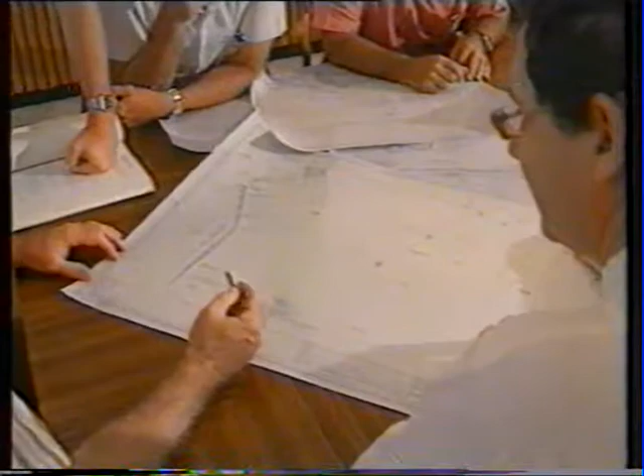NORQEB, in association with Balfour Beatty Mapping and Hydrographic Services, Pure Marine and Magnetic Marine, have undertaken the installation of a new 22 kV submarine cable from mainland Townsville to Magnetic Island, a distance of 12.4 kilometres. The project will take several months to complete, with the possibility of delays due to poor weather conditions. The new cable will initially be energised at 11,000 volts, being the standard distribution voltage of the region. However, the option is available in the future to energise this cable at 22,000 volts in order to double the capacity on the cable.

Magnetic Island has a permanent residential population of 2,000 people, the majority of whom reside in the 4 main bays at the southern end of the island. Development in these bays is residential, with a small amount of light industrial and commercial premises. In addition to the benefits of a regular supply of electricity from the mainland, the island also receives town water and telephone services. Magnetic Island is a relaxed tourist environment, patronised by most visitors in the region. This influx of tourists further increases the demand for suitable accommodation and facilities.

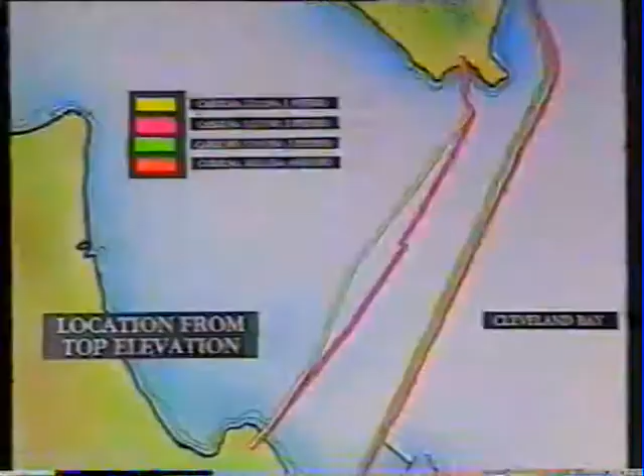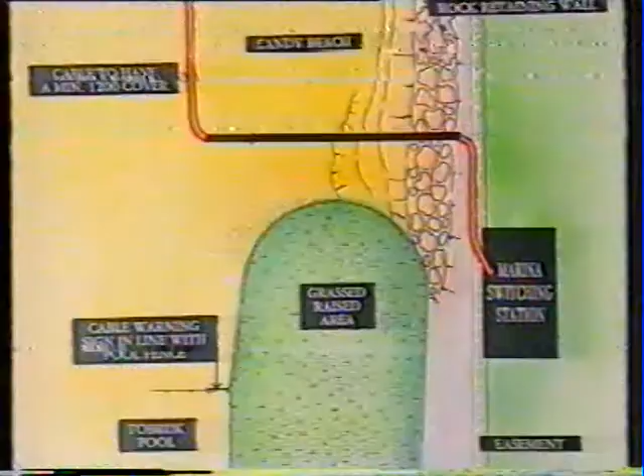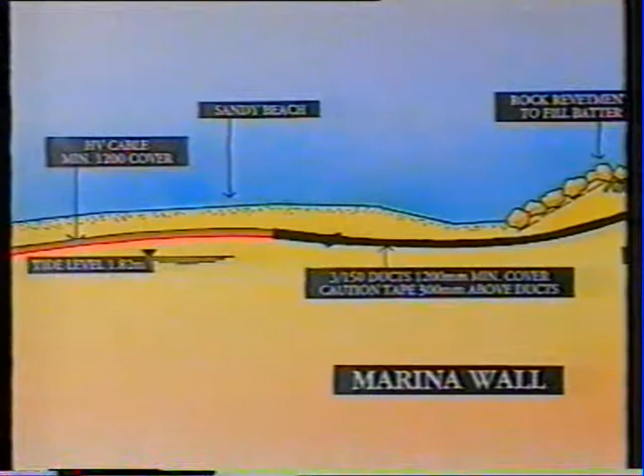Currently, the island is supplied with power from 3 submarine cables with a firm capacity of 2 MVA. With this additional cable, the firm rating to the island is now increased to 7 MVA. The cable route commences at the mainland Marina switching station and goes under the Marina seawall, along the beach and into the water, where it will be buried out to the end of the Marina entrance channel, crossing an existing telecom cable on the way. The cable was then laid across the seabed to the island and over a reef at Nelly Bay.

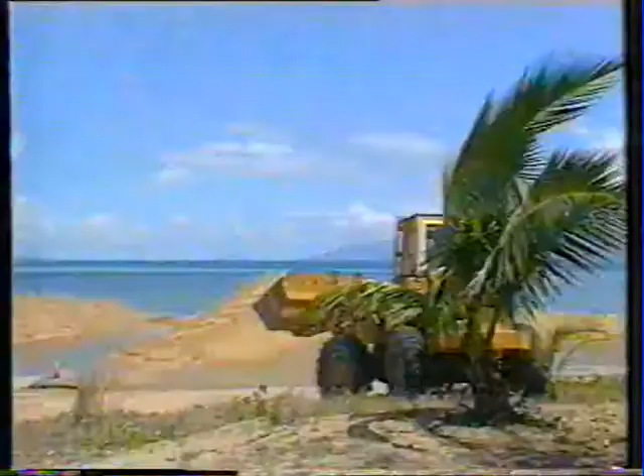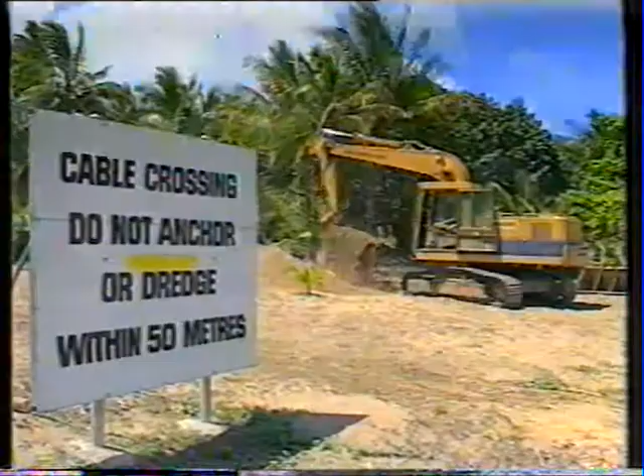Several permits and approvals were required from the Great Barrier Reef Marine Park Authority, National Parks and Wildlife Service, Department of Harbours and Marine, Townsville Port Authority, Department of the Environment, Fisheries, Department of the Environment, Beach Protection, Townsville City Council, Telecom, Breakwater Marina and Magnetic Quays Proprietary Limited. Since approvals and tenders have been called, a large stockpile of sand has been deposited on the intended cable route on the island foreshore. This additional sand represented an obstacle for the installation of the new cable. The job entailed firstly digging through to the original beach and then down to the required depth for the cable.

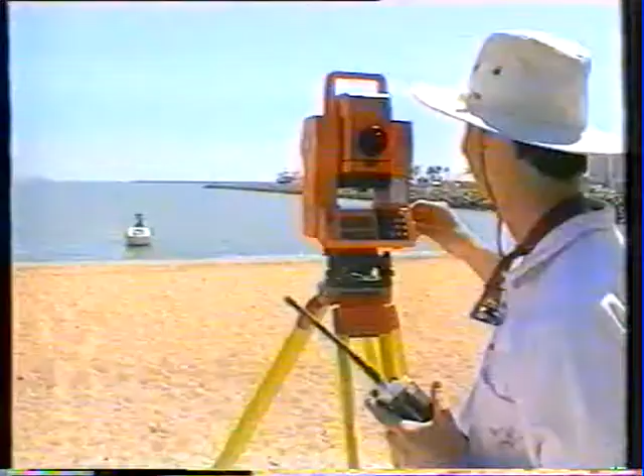200 metres of the existing cable number 3 will have to be moved to enable the new number 4 cable to be laid between number 3 and the Marina Channel, maintaining a clearance of 30 metres. 1,500 metres of the number 3 cable was buoyed to determine which sections needed to be moved over. The section of cable was excavated by divers using a suction dredge in zero visibility, raised, moved over and lowered to its new position. This section was then buried to a depth of 1.2 metres using a high-pressure water jet. An underwater telecom cable complicated the procedure further, as this cable had to be raised to shift number 3.

The new number 4 cable will also be buried to a depth of 1.2 metres for 1,500 metres at the mainland end and 150 at the island end. The remainder of the cable rests on the seabed. A team of divers is working in shifts below in the mud, where their only sense is through touch. With a high-capacity compressor, they have constructed a large vacuum pump, which sends a plume of brackish water 4 metres into the air.

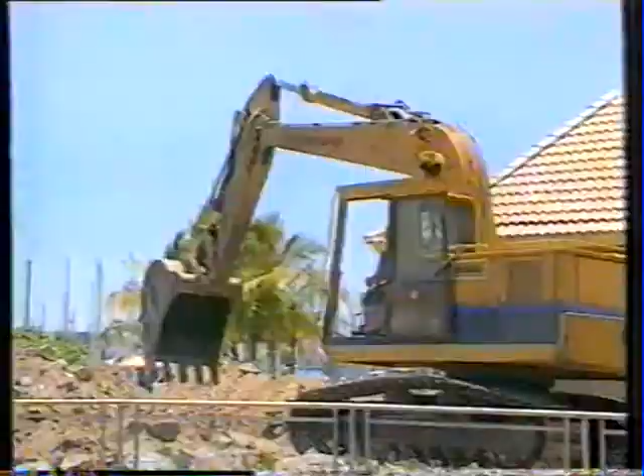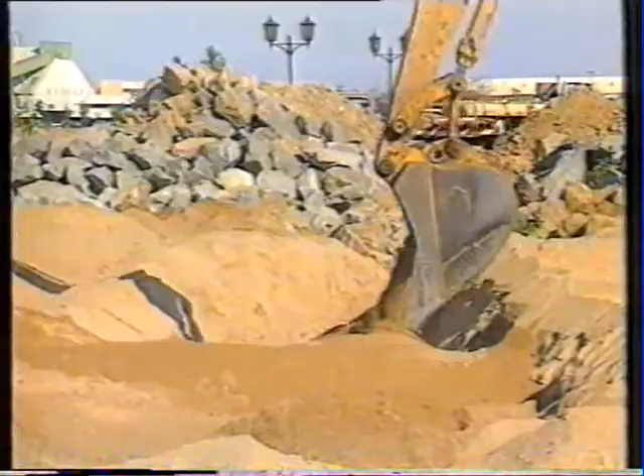Meanwhile, at the marina end of the operation, cable ducting and excavation are proceeding above the waterline. Additional ducting is being installed in the trench to obviate any need to dismantle the rock seawall in the future. At this time, CB Marine are making preparations for the floating platform to be used by the cable jointers.

The dumb barge is fitted to suit this particular job with heavy winches and 4-point anchoring capabilities. 2 of these sections will be bolted together and an air-conditioned aluminium shelter erected on the platform. Preparations are now complete for laying the new cable.

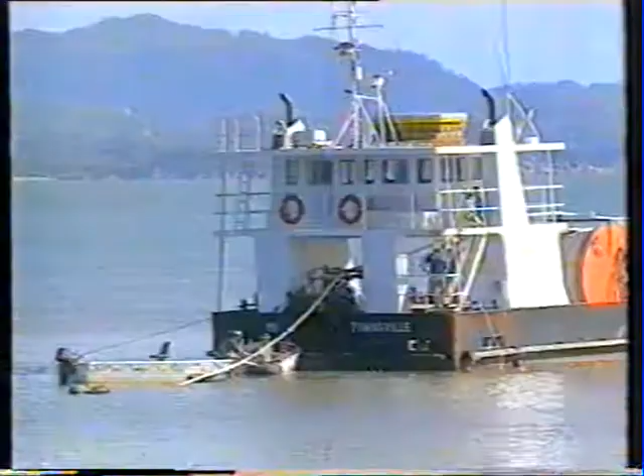A heavy vehicle barge, the Mark I, is employed to transport the cable to the site, and winching from the barge to the mainland end begins. It's a perfect day, and weather conditions are more than favourable for this process.

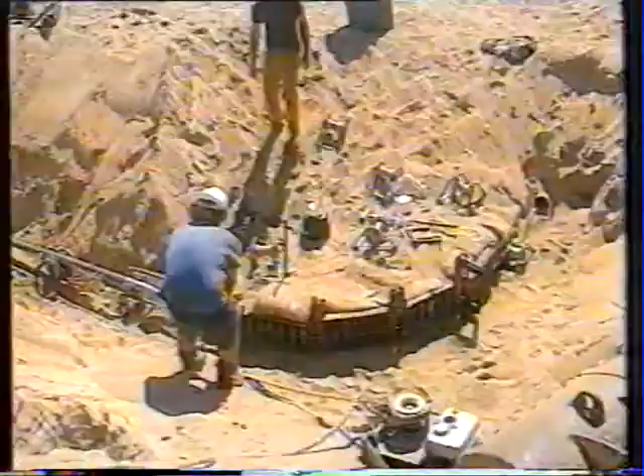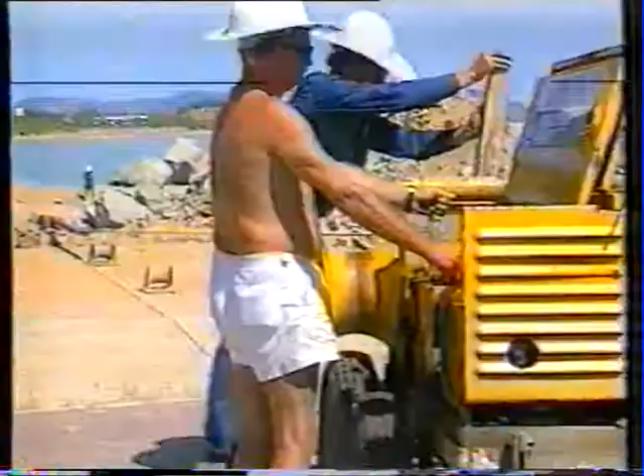To ensure the cable is placed correctly, the barge is anchored at the bow by 2 anchors, and the MV Tangaroa is kept standing off to keep the barge from drifting sideways during the winching. Additionally, the surveyors have located several bearing-fixing beacons at strategic positions, further ensuring the accuracy of the laying.

This section of the installation is the most complex and involves floating the first section of cable into position before lowering it down. The operation is continued successfully throughout the morning and progresses according to schedule. Having winched the cable through the conduit, the trench is then backfilled to the substation.

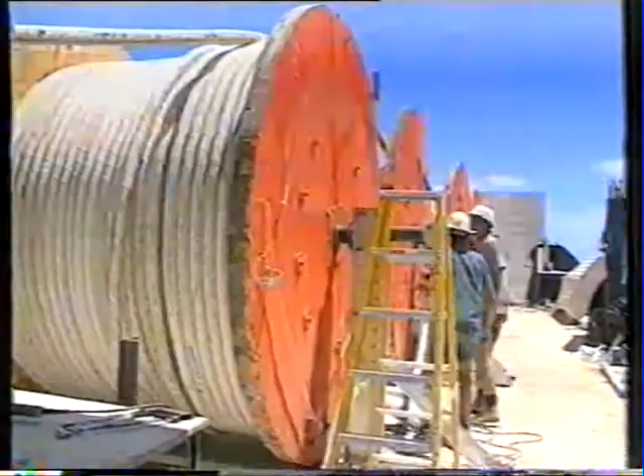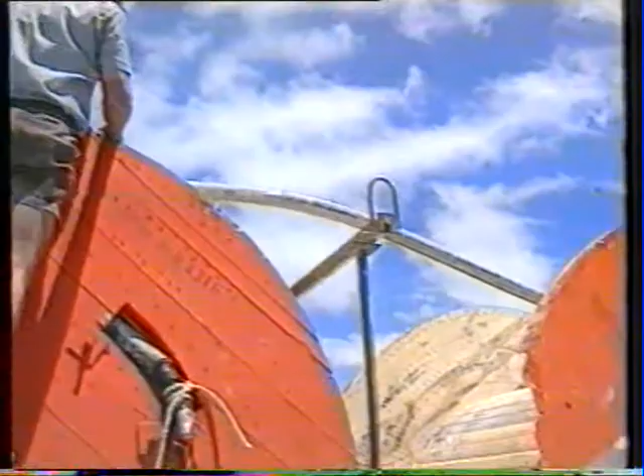Laying the cable is continuing aboard the Mark I. The laying barge is kept on course via visual means, with a land-based surveyor calling out corrections to course via radio link. The shipboard surveyor confirms position by means of a laser distance measuring device, calculating range to 2 fixed mainland stations. This range information will then form the basis of the as-installed plot. Maximum deviation to course of 10 metres was achieved almost 100% of the time.

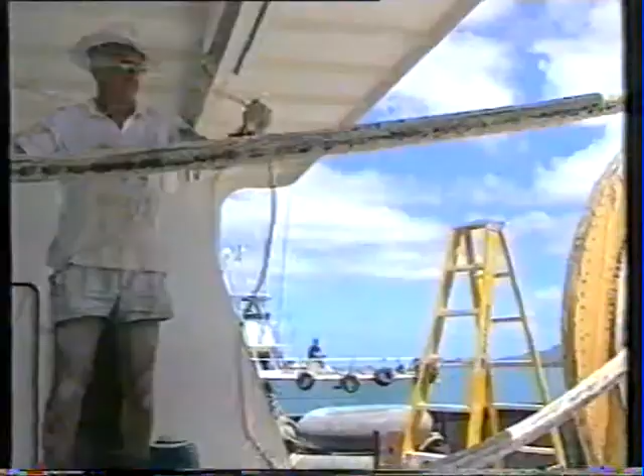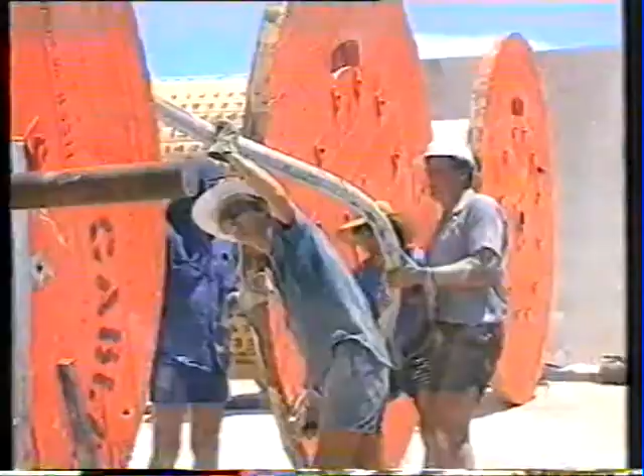The cable will be laid in 13 900-metre lengths and 1 250-metre length at sea, with the entire laying operation being performed in 4 separate operations of approximately 5 hours. The end of each cable is lashed to the next section as the cable enters the water. The weight of the cable and manoeuvrability at sea leads to some problems for the crew on the Mark I.

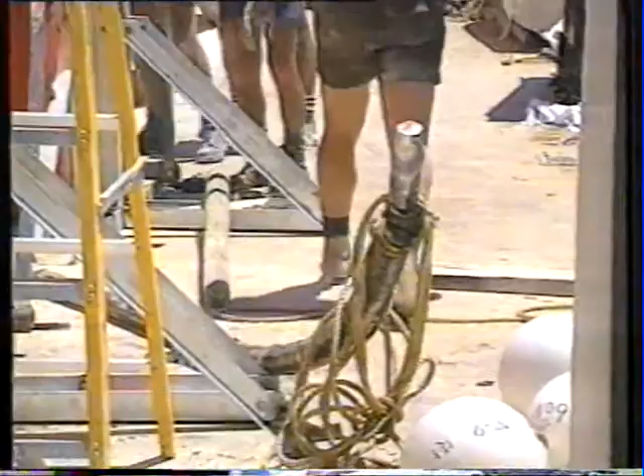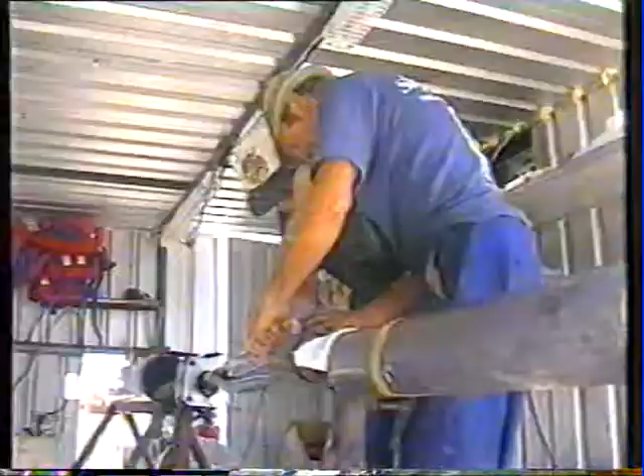Having laid the sections of cable in place, the dumb barge is manoeuvred into position over the first joint position, and jointing begins. Again, the services of the MV Tangaroa are called upon to manoeuvre the dumb barge into position. Cable ends are winched into the workstation, and work begins, jointing the cable.

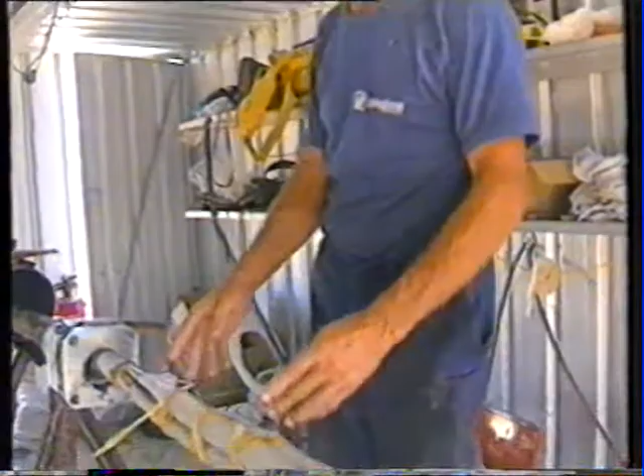What we've got, we've got two ends of the cable. So to join them together, we put ferrules. Right, we've got ferrules in. Ferrules in the middle. We sweat the ferrules, clean them, close them up, and then we insulate them. Bring the insulation up to the size they require on the drawing, then we put the screening over. Bind the screenings together at both ends of the cables.

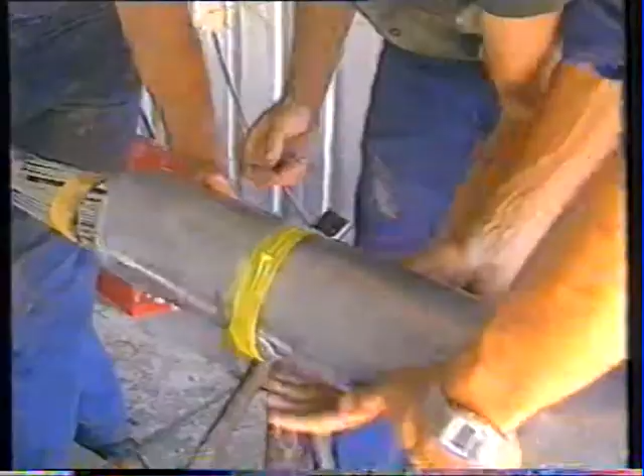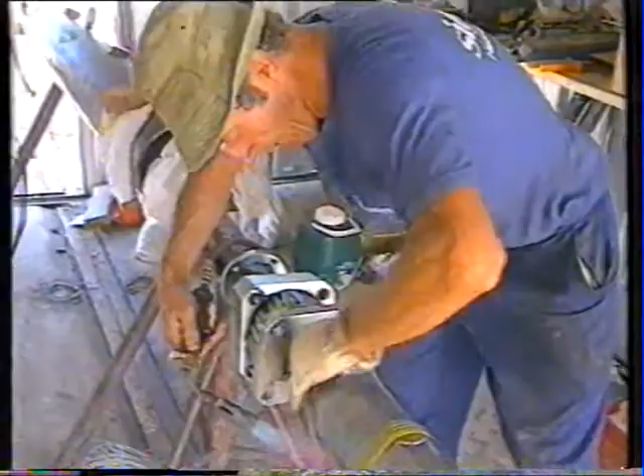And then after that, we slide the lead sleeve in, over, and we wipe the two ends. And we bring the bronze foil up to the wipes and re-wipe again at both ends. And then we put this sleeving up with oil, and it goes cold, and we top it up again, and then we seal the sleeving. The joint is complete. And then we put the protection box on.

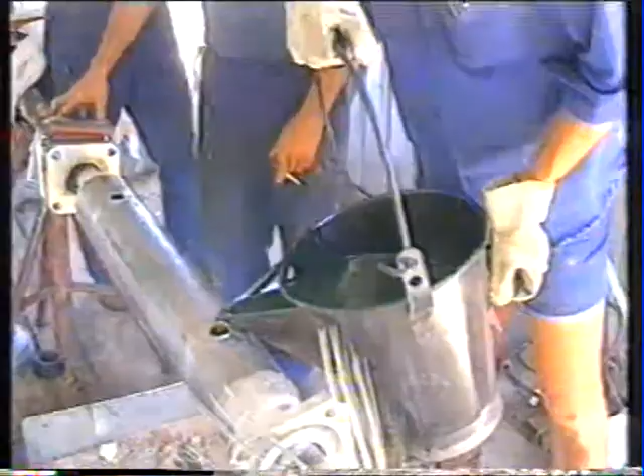I don't know how you're going to explain this, but the box, we got 4 bolts come through here. When we tighten up, this pulls together, and that's the seal. And then we pull the box over the top and join the two ends, and then we fill this box up with compound.

Once the joint is sealed, the cable is ready to be lowered the following morning, a process that takes considerable manpower to manoeuvre the cable into position. The weather conditions have deteriorated since the previous day, making the operation more difficult for all concerned.

The 4 anchors are then winched in, and Tangaroa tows the barge to the next joint position. At this point, the divers move in to check the joint has bedded down correctly, a process that will take place 13 times at sea and 1 on land, taking only 3 weeks to complete.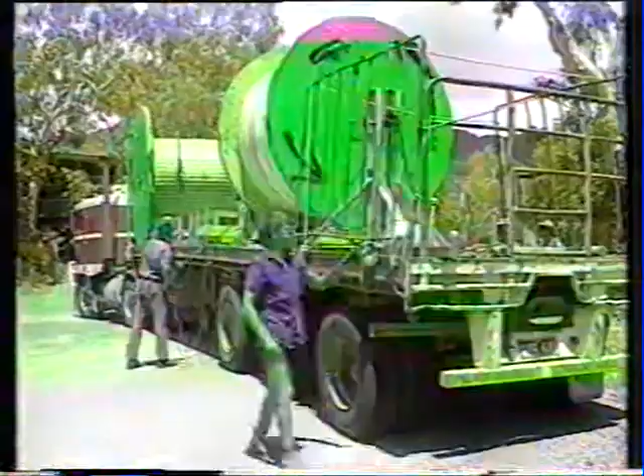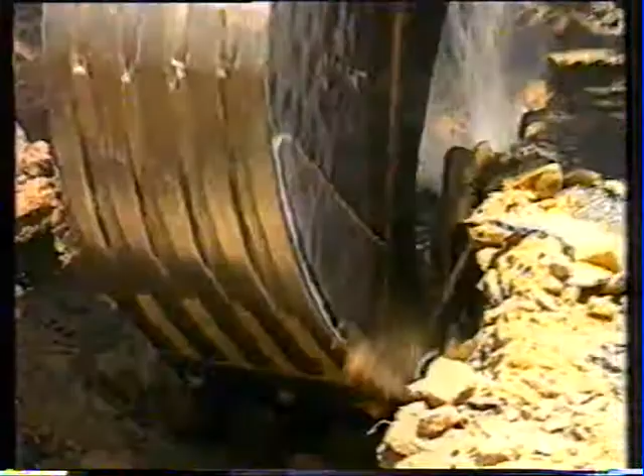This last section of the cable has come across by barge and will be installed from the semi-trailer using the excavator to start the cable pull. As with most operations of similar nature, there's bound to be some minor problems, and the excavator uncovers a small water main at the esplanade. This problem is soon rectified by local council staff who have been standing by.

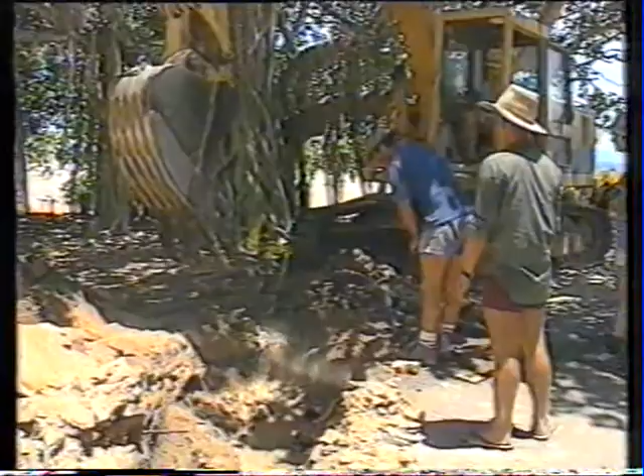The remainder of the cable has been floated into the Nelly Bay site. Excavation down to the beach site continues throughout the morning. Okay, this is where we're at with the cable now. We floated this one in yesterday. That's the last bit of submarine cable installed. We've got this one section we're excavating up here now.

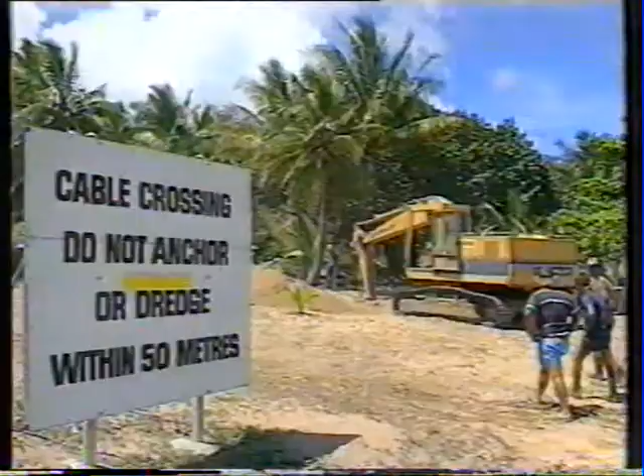We'll put that in this afternoon, and that's the total cable installed. Then we've got 2 submarine joints to complete, 12 and 13. And then we've got 1 land joint here, and termination and switchgear. So we're just about on top of it this day. Installation complete. The cable is ready for testing at the mainland substation.

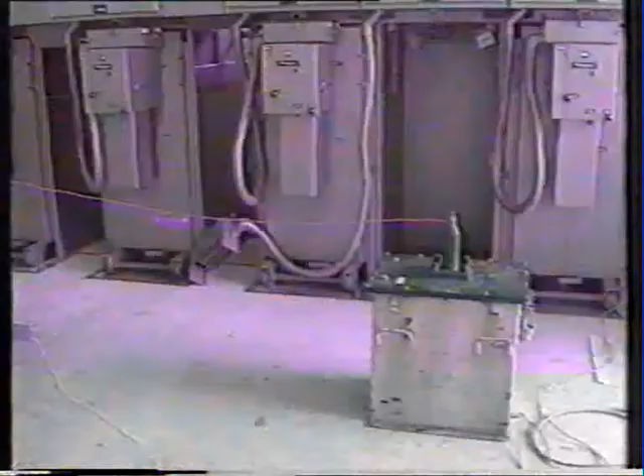The cable is tested at 22,000 volts in accordance with the specification before termination on the 11,000 volt switchgear. Then the completed circuit, including terminations, will be retested at 11,000 volt specifications. Having met the test requirements, the cable is now ready to be put into service. Switchgear is activated and operational.

Meanwhile, life on the island goes on as usual, oblivious to the installation and certainly better served as a result of its existence. This has been a presentation by the North Queensland Electricity Board.